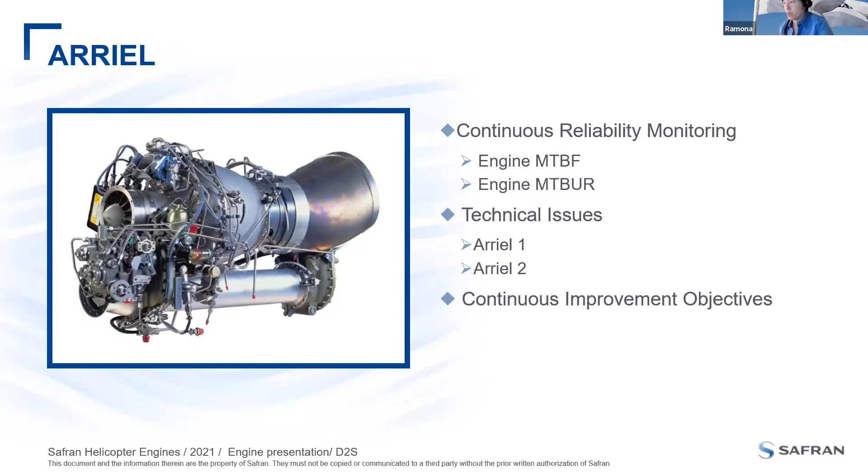Okay. All right, so reliability, continuous monitoring. Just one second, I'm going to stop my video because I got a message here that my audio is a little bit sketchy, so I'm going to reduce the bandwidth. Stop sharing. Okay, hopefully okay. So the video is off, so hopefully the audio will flow through a little bit better. Okay, so where was I?

So continuous monitoring - we're going to talk about technical issues related to mean time between failures. Over the course of the years, Safran Helicopter Engines analyzes data that comes in from the MRO, from operators, incidents, and we take that data and go through it with basically everything that we have, and we come out with analysis to identify the reasons for removals, the ones attributed to the engine - mean time between failures, and mean time between unscheduled removals.

Okay, so the mean time between failures for the REL engines, for the single engines right now, is 13,000 hours. That's data from 2020. And for the twin engines, that's 16,000 hours. So it shows that the Arriel engines are very reliable, and the removals related to these types of failures are beyond the operator's control.

Okay, so these removals can be mitigated through maintenance manual updates, like modifications of criteria, such as increasing the periodicity of a borescope inspection, or they can be improved with modifications to the parts. So something to keep in mind is that not everything requires a design modification, but there are always corrective actions to reduce these types of removals.

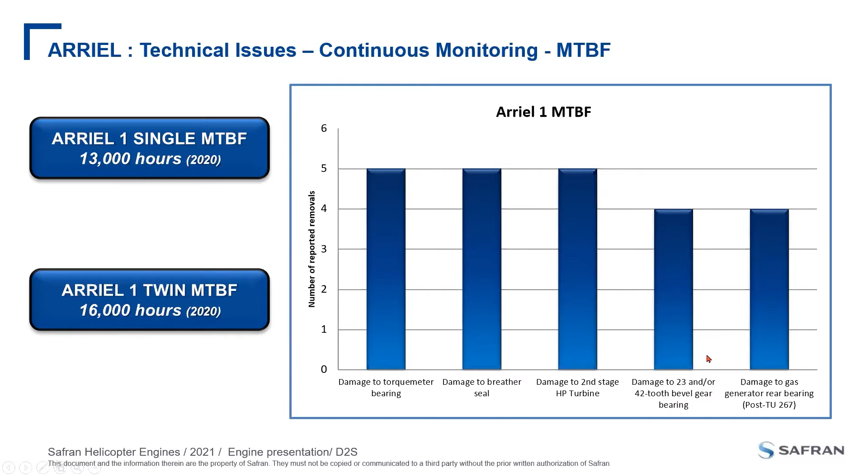This illustration shows the location of each damage and the modifications we've developed to reduce this type of removal. As I said earlier, the top reason for removal is damage to the torquemeter bearing located in module 5. Previously, with the old generation bearings, it was a triplex bearing. Since then, we've developed a modification to include a monoplex bearing that's more robust and resistant to skidding. So now you've got one bearing instead of three, working with the torquemeter piston.

The second reason for removal is damage to the breather magnetic seal. We had 5 cases in 2020, so there's a dedicated study group analyzing removals due to mag seals. This isn't just MAC seals to the breather gear, but also MAC seals related to the starter generator, MAC seals to the power shaft, and the MAC seal for the fuel shaft located on the rear side of module 5. The study group has put together some recommendations, which I'll give more details on later in this presentation.

Another thing we've developed and improved is a video installation tutorial available on the Customer Portal. That video was updated earlier this year, so I invite you to have a look at it because it's very informative and gives a good illustration of how to install the mag seal, along with some tricks you should adopt.

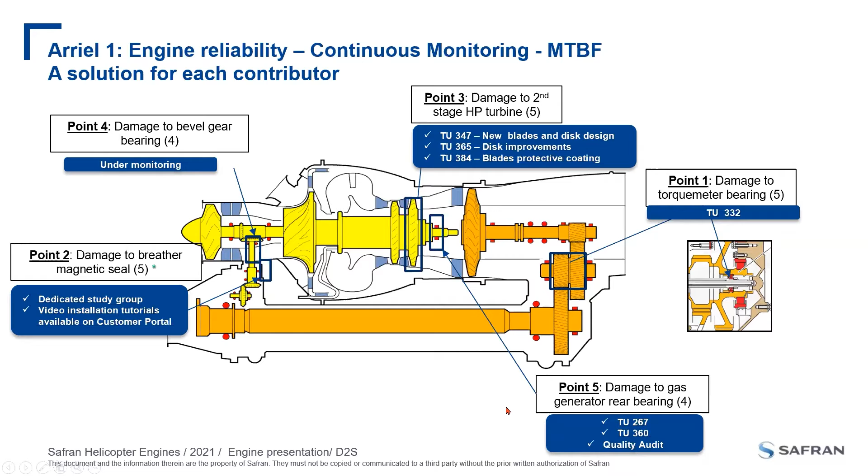Now that we've covered Arriel 1, I'll go into some insight on the Arriel 2 analysis we've done. For the Arriel 2 single engine, the MTBF is 17,000 hours, and for the twin engine variants, we have 1 unscheduled removal every 12,000 hours. So despite the issues we have, the engine itself is very reliable.

The top reasons for removals, the top 5 we've identified: first is free turbine rubs, with 8 cases in 2020. Then 5 cases of module 5 and module 2 oil plug bonding, causing oil leaking from these oil plugs. And 5 cases of damage to the axial compressor rear bearing.

The fourth reason for removal is 5 cases of damage to the gas generator rear bearing in module 3. And lastly, we have 4 cases of damage to the free turbine labyrinth.

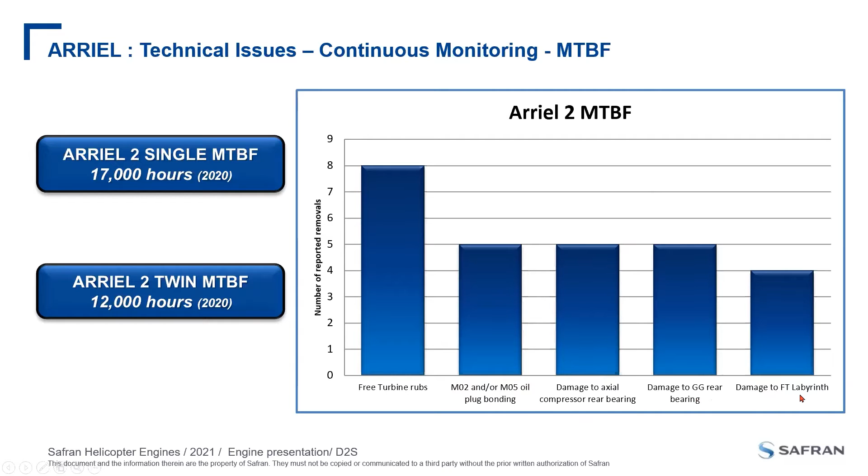Once again, illustration of the location of this damage and the modifications that we've developed to mitigate them.

Top reason for removal located in module 4 is the free turbine. We've seen 8 cases of free turbine blade tip rubs. Something we need to note is that the clearances between the shroud, or the blade path, and the blade tip itself are very, very small. That's because we need to extract as much energy as we can from the gases. But having clearances so tight, there tends to be some possibility of blade tip rub.

So we've introduced a modification called TU 215, which increases clearances between the blade tips and the shroud. It strategically increases the clearances at the 4 o'clock location as well as at the 6 o'clock location, just by a little bit, but we're still able to maintain the engine performance.

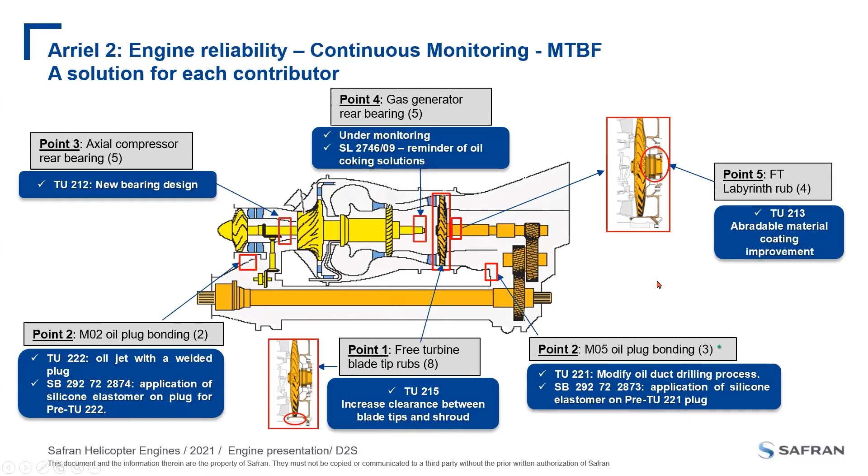Now I would like to talk about unscheduled removals that could be improved or avoided through maintenance recommendations. The MTBUR for the Arriel 1 single engines is 5,500 hours, and for the twin engines that's 4,700 hours. On average, you have one unscheduled removal maybe about every 5,000 hours.

These removals are due to maintenance that can be controlled by the operator. As you can see from the top reasons for removals, the top two are erosion, corrosion, air path fouling, and FOD. In total, just these top two reasons accounted for 63 removals in one year, in 2020.

The third reason for removal is operator handling errors, with 11 events. The fourth reason is unconfirmed causes, with 9 events, where engines or modules were sent back to us and we could not identify the reason for removal, such as an oil leak, starting issue, or noise. It's very important to actually contact your field rep prior to removing the engine.

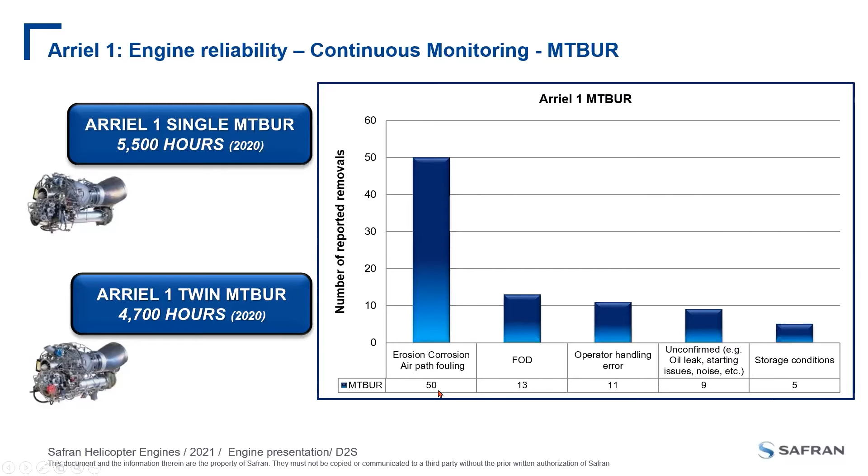The importance of this is to highlight that the majority of unscheduled removals can be reduced if you adapt your maintenance to your operating conditions. So if you foresee that the aircraft is flying in a very salty or polluted environment, increase your engine washing and cleaning procedures, because that really helps a lot in recovering performance and reducing your repair costs.

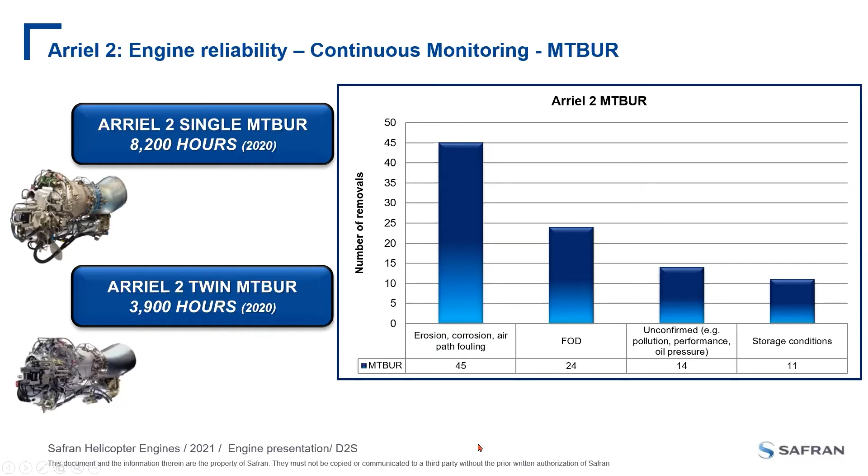As an example, we did a very detailed analysis on the main contributing factors, which are erosion and particles and corrosion that are introduced into the engine. As a result, we've got performance degradation and premature removals. This is our top unscheduled removal cause.

From our analysis, we've seen that if you take control of your corrosion and wash your engines, the actual corrosion removal rate is reduced by a factor of 4. That's done by simply cleaning and washing your engines, and that increases your T4.5 torque margin. That's all done by customizing your maintenance — it's proven. By doing that, you increase your engine availability and reduce your operating cost.

Air path fouling causes a lack of airflow in the engine, and with air path fouling you have a loss of power of the engine. So that has a huge impact on your engine aging.

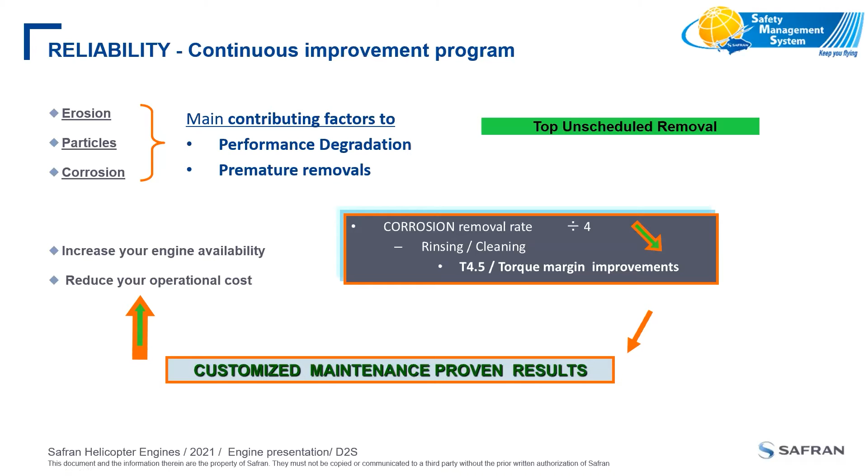One thing I'd like to bring to your attention as well is that water quality is important. If you use plain water, like tap water, it has very high mineral content, so when you dry your engine you've got lots of deposits in your engine. Please use filtered water.

Here I have a real life example to show that rinsing, washing, and cleaning the engine does work. In the top corner of your slide, we have two photos. Here you can see that this engine is quite dirty — it's got a lot of probably salt deposits or some sort of particles in the combustion chamber. Before cleaning, the torque margin at ISO T4.5 was 3.4%. After cleaning, that torque margin increased to 11%. So that's an 8% increase by just cleaning your engines — a very significant increase.

There is a general service letter, GSL 3055, that was issued in October 2020. This service letter is very informative — it provides a description of environmental conditions that are typically associated with erosion, corrosion, and engine fouling.

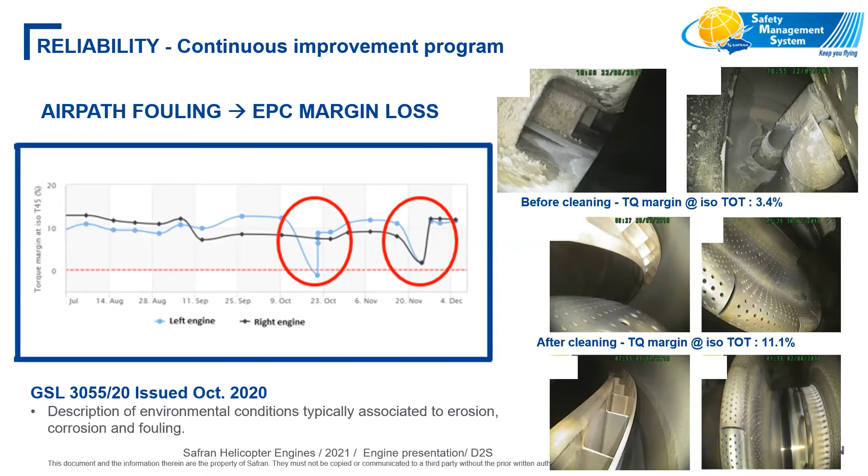All right, so now it seems like the opportune time to talk to you a little bit about safety management system. The previous slide that I had presented is kind of in the spirit of Safran's mandate for our safety management system. So Safran Helicopter Engines, we focus a lot on adopting a safety culture, and we have put in place a safety management system.

So the importance of it is that it encourages everyone, the OEM as well as the operator, to put in place a system that has a methodological approach towards managing safety, which includes the necessary organizational structure, your accountabilities, your policies, and your procedures. The SMS will only be effective through an understanding of the hazards in your organization, the associated risk, and the development of strategies to mitigate these risks.

So it can be as straightforward as customizing your maintenance program when operating in an erosive and corrosive environment, or maybe if you're already in an area where there's increased risk of FOD. By putting in safety nets, you're going to reduce your risk of FOD. And as well, the top two categories of unscheduled removals that I mentioned before—erosion, corrosion, and FOD—can be addressed, and therefore you'll be reducing those removals.

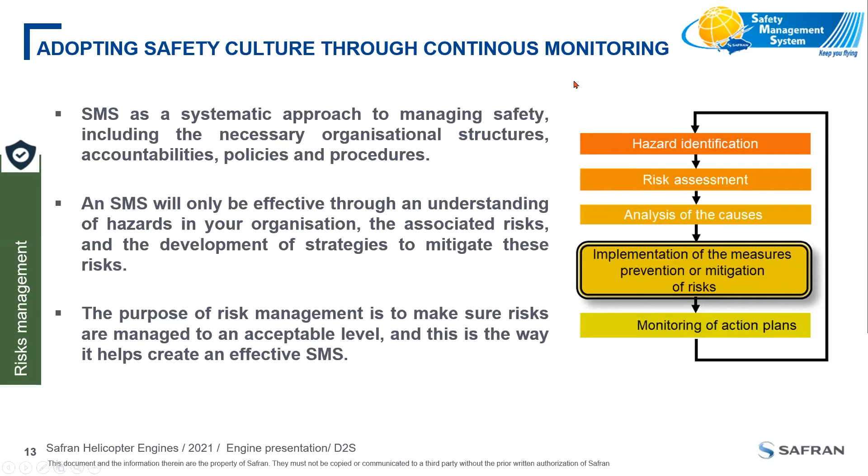All right, so we're midway through the Arriel presentation. I'm going to talk to you about a few bits about technical issues on the Arriel.

Arriel 1. So this I've heard from a few operators, as well as from my engineering department, as being a top irritant: the magnetic seals on the Arriel 1 and 2.

So, putting things in context, this is observed during maintenance or during a pre or post flight check. Seepage of the oil onto the engine deck is no longer tolerated by operators. Customers have requested to drain the oil leaks, and some of the other OEMs have this method in place to drain the oil leaks into a common drain. But the majority of our events are associated to starter mag seals.

And as you can see here from the photos to the right of the slide, we've got oil that's coming through or pooling at the starter generator flange, and that's the mag seal that's in there.

Root causes for oil leaks from the mag seals: the assembly process. The actual graphite ring in the mag seal is very sensitive to shocks, so any minor chips or cracks or even dust could reduce the efficiency of sealing the oil. There's also this subject about the design and the repair process—there are limitations to the design of the mag seals.

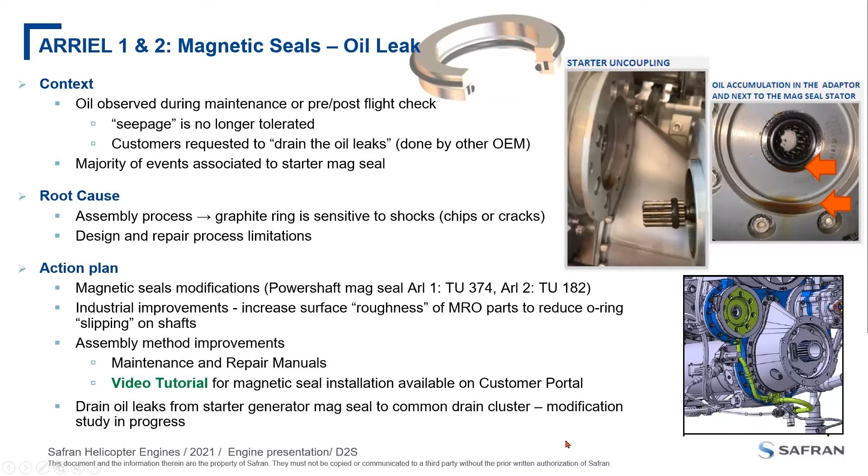Okay, so technical issues for the Arriel 2. This is one of the top reasons for removals that I mentioned earlier, attributed to the engine.

It's the module 5 oil seepage at the oil duct. This is noticed during a visual inspection. It's not an airworthiness issue, but what you may see is oil coming down on the front face of the module 5 from that oil duct and the nut and washer. This happens because the bonding starts to degrade over time.

So some corrective actions are in place. Firstly, if you see it, it's more of an irritant. If your oil consumption is less than 200 milliliters per hour, then keep it in service until your next scheduled maintenance. There is a modification in place for it.

That modification changes the way we drill and produce the oil duct. With the pre-mod, we would drill from the outside in, so outside of the module casing into the duct for the oil jet, to access the oil jet. But now with the new modification, TU 221, we drill from the inside out, going in from the internal side into the module 5. We drill it and stop before it reaches the outer part of the module 5 casing, then we stop.

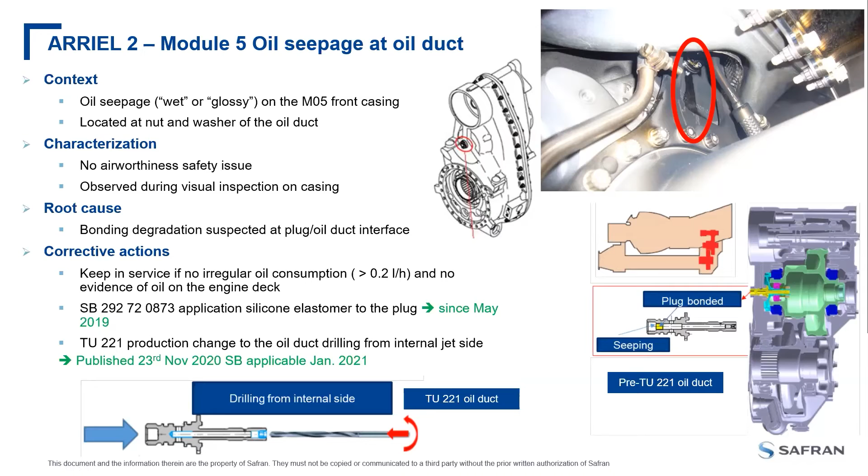Next topic I would like to share is the Arriel 2D and 2E oil pump leakage. Putting things in context, this was observed on the engine deck during a post-flight inspection, and the oil originates from the screws there on the oil pump.

Root cause of it is that these particular screws don't seal the oil pump efficiently. All pumps concerned are pumps with part number 0292 12 5130 and 5140. Typically, we've seen from our return of experience that the oil tends to leak with the oil pump less than 60 hours.

The screws that we've identified, ending in 0230, have been installed on pumps with serial number below 4232 MTL. So these pumps, manufactured before July 2020, have an issue with oil leaks.

Corrective actions that we've put in place: firstly, we've developed new calibrated screws, part number 0292 120690. These screws have been installed onto all pumps with serial numbers ending in VEI, and on all pumps starting with serial numbers 4232 MTL.

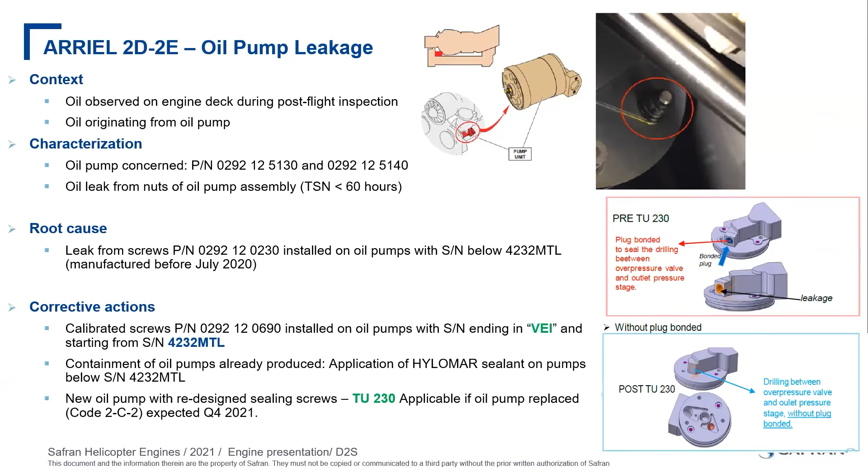So just in summary, through all this continuous monitoring in the previous slides, and through our SMS and continuous reliability analysis, we've identified areas of improvement where we have diligently developed solutions. In the last 3 years, we've developed a modification to improve the motor 2 bearing, that's TU212. We've had increased cases of fuel coking, so we developed a modification to the fuel injection manifold, more tolerant to fuel coking, that's TU208.

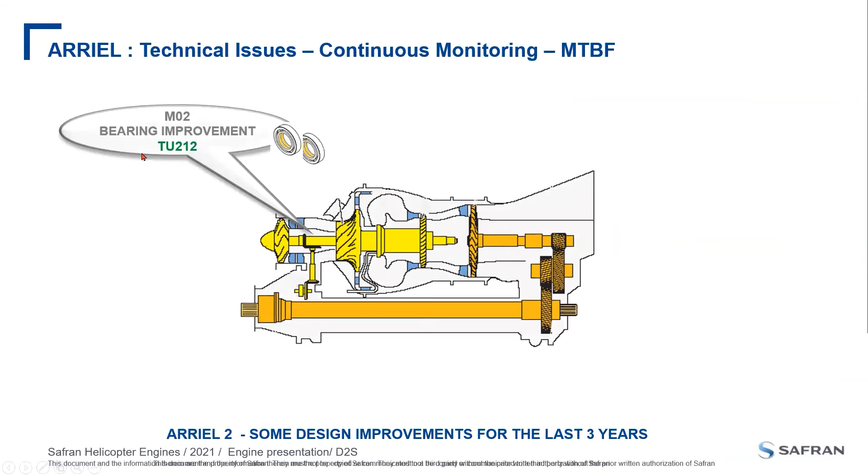We've also had some cases of power turbine blade tip rub, so a modification to the shroud, TU215.

Labyrinth seal coating, right, TU213.

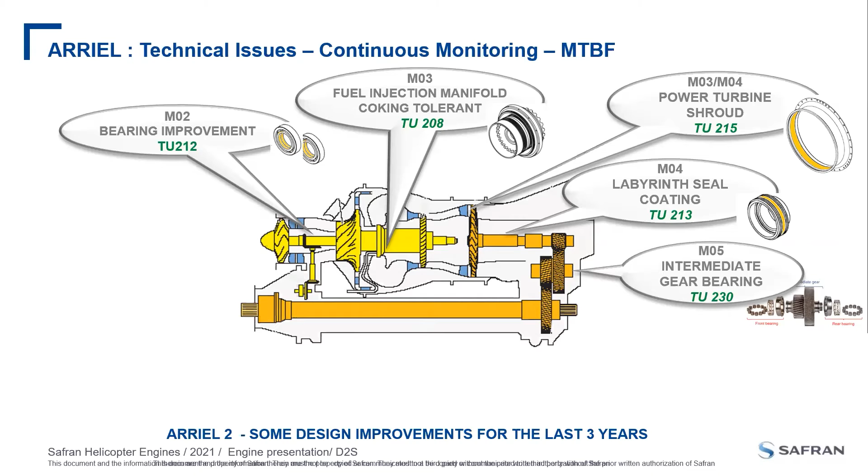Module 5 intermediate gear bearing, TU230. That's introducing more robust bearing to the front and rear of the intermediate gear, so it's more resistant to maximum loading.

In module 3, we've got oil sealing systems and improvement to the sealing, so improvement to the supply duct, the scavenge duct, and the vent duct. That's TU181 and TU201. Conformation boxes, we've increased their reliability, improved it through TU192.

Module 1 front support, TU197. And improvement to the front casing wear of the accessory gears, that's TU194, which includes a bushing into one of the accessories, the actual 41 tooth gear.

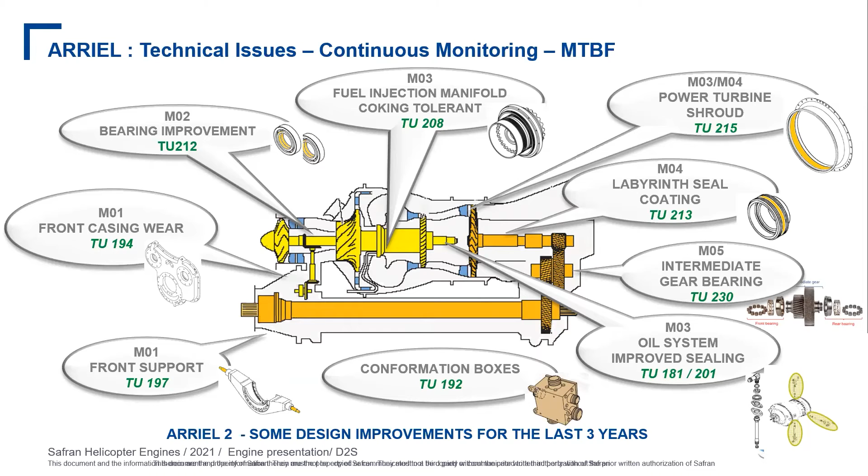All right, guys and ladies, we're going to go into some information I'd like to share with you that concerns the FCU, HMU, and accessories.

So similarly to the bare engine, we also do reliability monitoring on the accessories, FCUs, and HMUs. So for the Arriel 1 FCU reliability, the top reasons for failures.

The first one comes in at 17 removals in 2020 due to matched pistons out of limits. Second reason for removal, 17 cases, damage to the NG and or the NTL seal. Third reason for removal, damage to the diaphragm of the deceleration control unit. And fourth reason for removal, static droop out of tolerance.

Out of these 4 reasons for removal, we have developed 2 modifications that allow you to replace and repair these parts in the field. First one we shall address is the NG and the NTL seal.

You can look at the illustration to the right of the graph here. So the NG shaft varilip seal, we developed an internal modification to improve the quality and sealing of the NG varilip seal. And to address the fuel leak from the NTL seal, we've developed modification TU367. This is an improvement to the dynamic sealing of the Sealol seal.

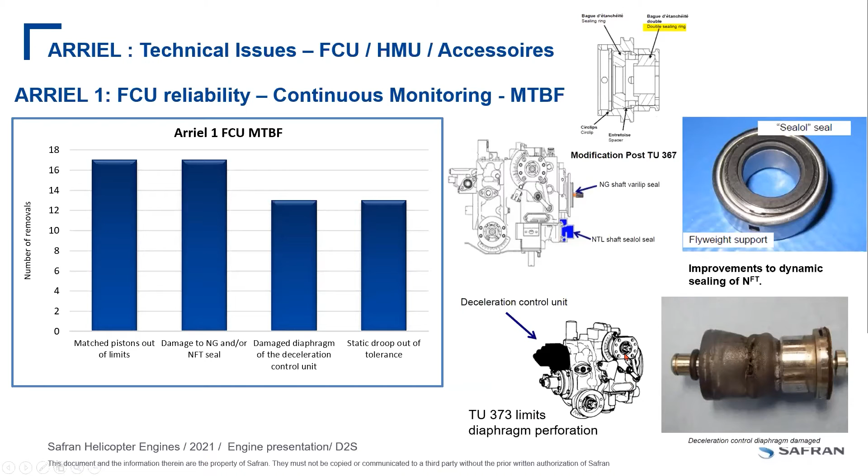Moving on to Arriel 2, HMU reliability on the single channels. Top reason for removal, we had 5 cases in 2020, and that is damage to the drain valve assembly.

Symptoms that you would expect here, if you have a damaged drain valve, is start stagnation, slow start, fuel leak at the drain. This drain valve assembly can be replaced in the field.

Second reason for removal, actuator resolver damage. There is a modification available, that's TU83, which increases the actuator reliability by improving the stepper motor characteristics.

Third reason for removal, P3 body assembly anomaly. That's where in some cases we found a pierced P3 capsule. This P3 capsule can be replaced in the field as well, as a level 2 maintenance action. Symptoms that you would see from a P3 capsule anomaly is slow start, aborted start, or even no ignition.

Last reason for removal is rotating load limiter. Symptoms you would see with this type of damage is a slow T4.5 increase during start, that's when the rack itself is distorted. Unfortunately with this, there's no field replacement available, so we'll just have to replace the complete HMU.

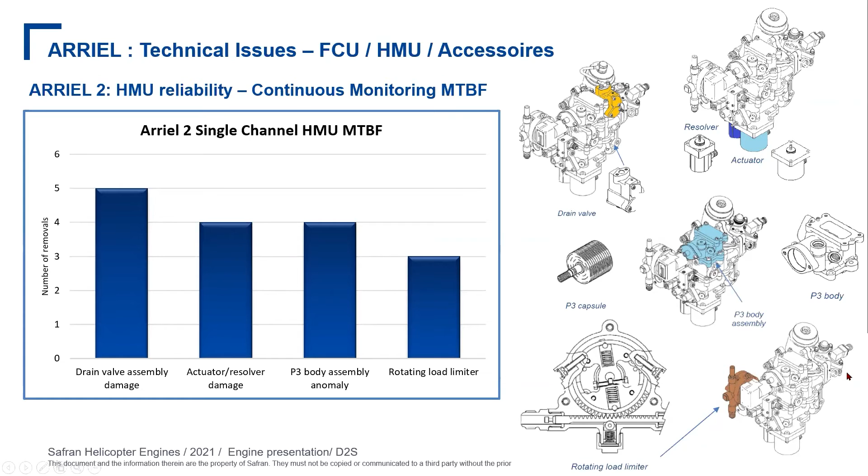Arriel 2 dual channel HMU MTBF. Top reason for removal, we had 82 cases of removals due to damage to the splines of the HP pump, LP pump, or the coupling sleeve.

This inspection is called out, as we all know, in the SB 29273-2851. This is for post TU177 HMU, where it needs to be inspected every 800 hours.

Second reason for removal is the LP pump assembly wear, about 12 removals in 2020. Drain valve damage, similar to the single channel, is replaceable in the field.

One thing I'd like to bring to your attention is related to the HMU inspection. Alert SB 29273-2851, that's revision D, Delta, that was issued in May this year, May 2021.

As a little quick refresher, this SB requires you to inspect the HP and LP interpump splines every 800 hours, looking for signs of wear. What the SB calls out, or the technical instructions call out, is a demarcation of the splines.

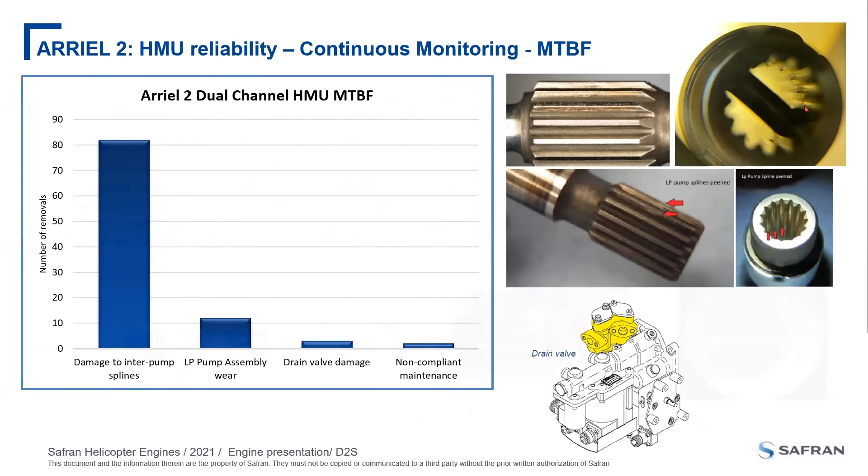Here you see certain demarcation on the splines of the HP, the LP, as well as the coupling sleeve. But one thing that has changed in this SB, in the revision D, is the possibility of just replacing the coupling sleeve.

But this can only be done if there's only contact wear on the HP pump, so the HP pump shaft. That's just little wear marks around here on the face of the HP pump shaft. If that's the only damage you see during your inspection in location 5, then you can keep the HMU in service by just replacing the complete sleeve.

However, if you find some sort of demarcation or corrosion on the splines itself, whether it's on the pump splines or on the sleeve splines, then that still requires HMU replacement.

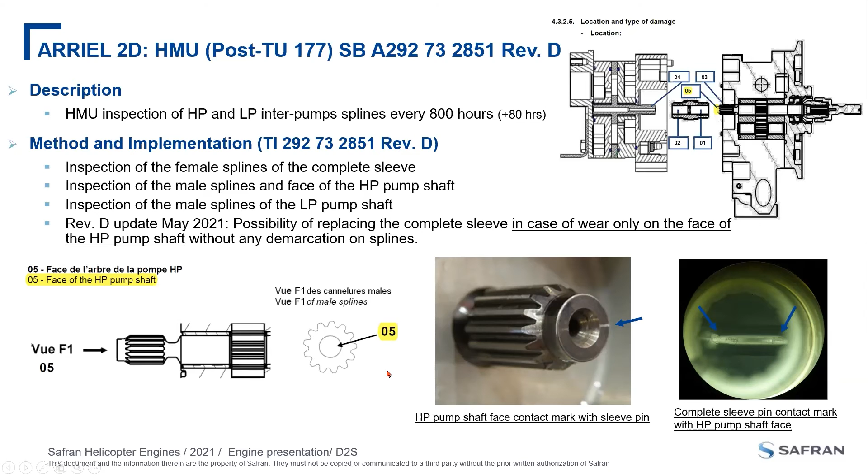Okay, so the medium term action plan that we put in place is TU210. That's a DECU software modification that monitors low fuel pressure. It introduces an algorithm that's able to detect low fuel pressure prior to an in-flight low fuel pressure indication.

This detection comes up as test reference 185. This DECU software modification also introduces a signal in the event of a sudden interruption of fuel supply at the engine inlet, and activates the engine stop electrical valve to limit damage in case of a power turbine overspeed, when your N2 goes beyond 120%.

One thing that's very recent in customer portal is that in the event you have a test reference code 185, you are required to perform an EDR dump. Our customer portal just last week has been updated to include a module where you can upload your EDR dump directly to customer portal.

That is outlined in Service Letter 3072/21/ARL2. This makes everything more streamlined. Instead of sending it by email through a Dropbox, because those files are very big, you can securely upload it to our server, and this data is then sent to the specialists who are able to perform an analysis of your EDR dump.

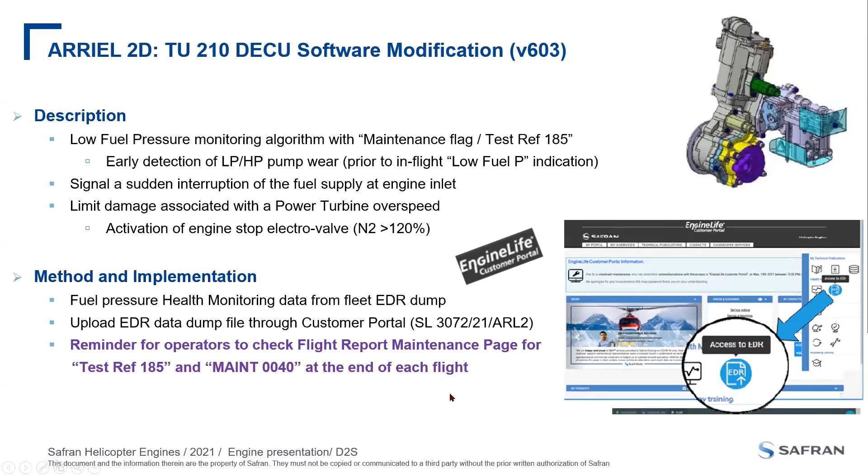Okay, so lastly, continuous improvement objectives - a brief overview of what we have done recently and what we plan to do in the future. In 2019, we removed the use limit life of the bearings on the Arriel 1 and 2. The Arriel 2D free wheel has TBO increased to 5,000 hours. Arriel 2E has a TBO of 5,000 hours.

In 2021, still before the end of this year, we are anticipating an increase of our injection wheel cycle limit on the Arriel 2+ and 2x2, from 8,000 cycles to 10,000 cycles. The package is with EASA. EASA is reviewing it, and we've been persisting with them for a response before the end of this year.

We expect it to be a positive response, but of course there's always the risk that EASA could come back and say no. Just watch this space, and I will be sure to advise our field reps once we get an answer from EASA.

Okay, so in 2022, looking a bit forward, a work in progress is that we are evaluating the Arriel 2B1, 2D, and 2E maintenance plan. Sometime in the future, forecast for the Arriel 2E is to extend the main inspection from 800 hours to 1,000 hours.

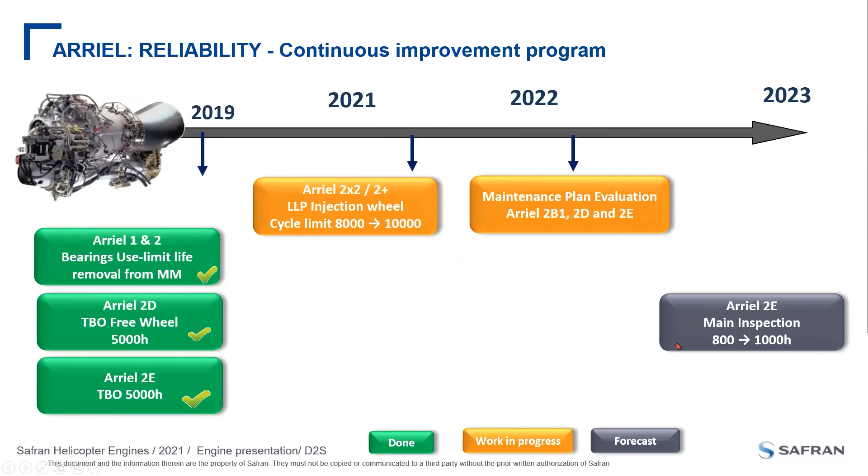All right, so that brings me to the end of the Arriel presentation. Do we have any questions?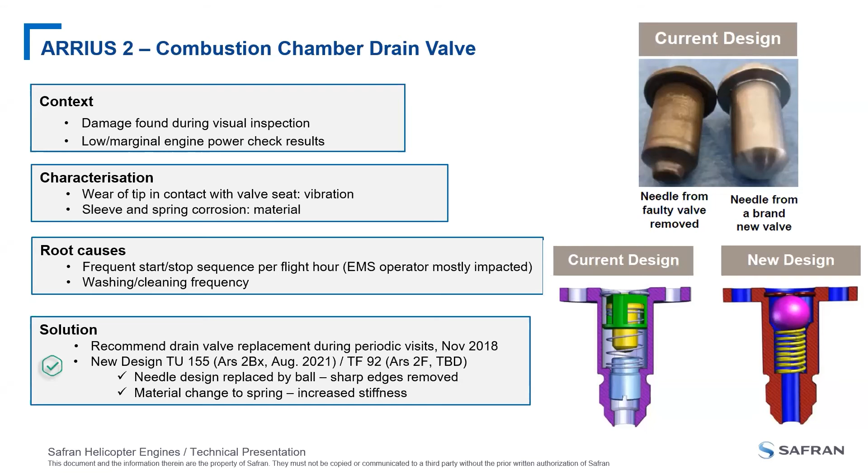Okay, so Arrius presentation. Arrius 1 and 2, I'm gonna go through it in a similar fashion as the ARIA 1. We're going to talk about continuous reliability monitoring and MTBF and MTBUR and the Arrius 1 and 2, and then we're going to elaborate into some technical issues for the Arrius 1 and the Arrius 2.

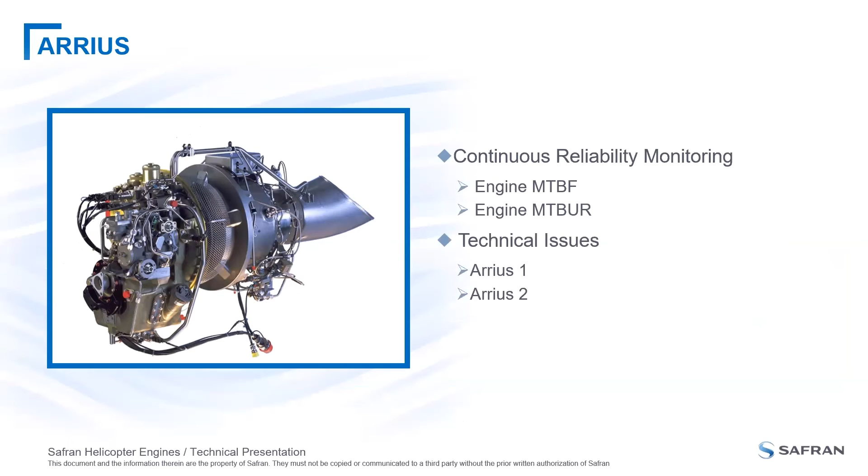Alright, so the Arrius 1 - your mean time between failures is 4,100 hours. That's about 1.3 times your engine overhaul life. The engine overhaul is at 3,000 hours. So you've got one unscheduled removal every 4,100 hours.

Top 3 reasons for removals for the Arrius 1, because they only have 3. The first one is a big one - damage to the accessory gearbox bearing. We had 10 cases in 2020, followed by 2 other reasons for removals, at 1 each: damage to the reduction gearbox output gear rear bearing, and 1 case of clogging to the rear bearing oil return pipe.

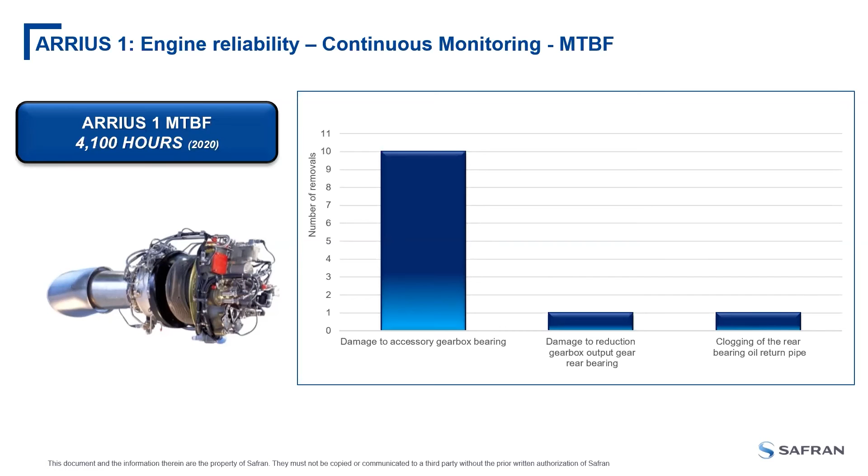Okay, quick illustration of the damage. Top reason for removal is module 1 accessory gear bearing damage, 10 cases, and this is associated to that bearing at the front and the top section of module 1. TU-121 has been developed and it replaces the bearing with a riveted bearing that's more robust to certain forces that would have created damage to the previous modification.

Second reason for removal, just with 1 case, is damage to the output gear rear bearing. 2 modifications are available for it: TU-114, which increases the rear bearing race strength, and TU-119, which improves the oil scavenge flow path. Oil flows from module 2 down to module 1, and sometimes that affects the operation of the rear bearing in module 1.

Third reason for removal is clogging of the rear bearing oil return pipe. There is a modification in place for that, known as the non-return check valve, TU-85, which is installed in the scavenge line. This stops any oil flowing back into the rear bearing area after engine shutdown. Now, if your engine is still persisting with coking in the scavenge pipe, please reach out to your field reps, because there is a mechanical cleaning procedure that we can issue through a technical agreement specific to your needs.

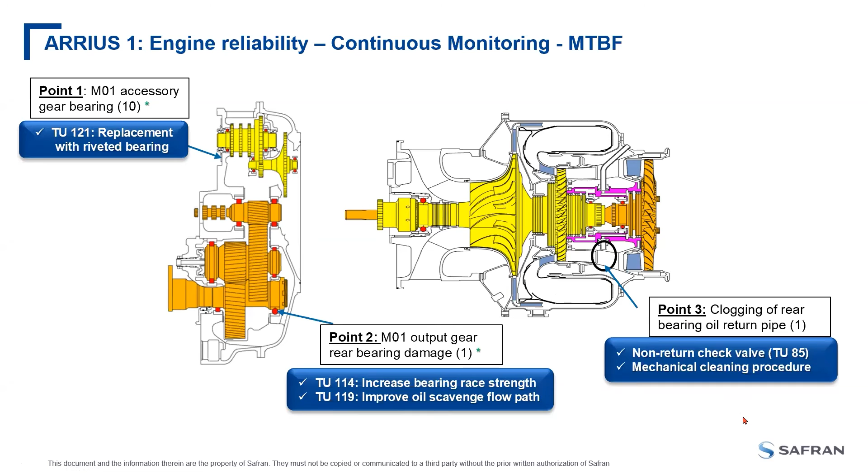Arrius 2 mean time between failures in 2020 - the MTBF for the Arrius 2Bx engines is 1 unscheduled removal every 7,900 hours. So that's almost, let's say, 1 removal every 2 overhauls.

Your top reason for removal is 8 cases due to cracks in the combustion chamber. The second reason for removal is 5 cases of the module 2 rear bearing supply and scavenge ducts that have cracks in them. The third reason for removal, 4 cases, is due to damage of the free turbine NGV Omega seal. And the 4th reason for removal is damage to the starter and breather mag seals.

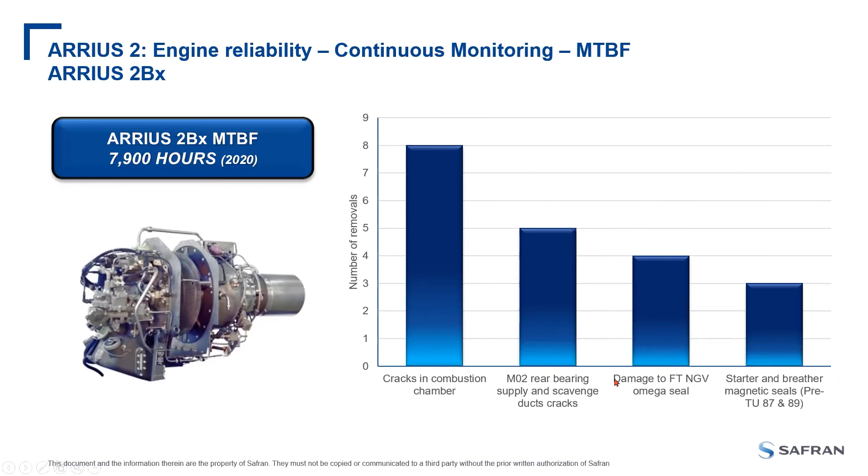So first point, cracks in the combustion chamber, right here in module 2. 3 modifications are available for it: TU-117, which improves the fuel draining and optimizes the purging of the fuel system. Second modification is TU-135, which improves the flame tube robustness, introducing new material as well as ceramic coating to the dome. And TU-142 is the thermal insulation seals at the injectors. I've got a slide later on to give you more details about these modifications.

Second reason for removal - cracks in the rear bearing oil duct due to repetitive high tensile stress. We have 5 cases in 2020. What happens here is that one end of the duct is connected to the outside of the turbine casing to module 2, and the other end is connected down to the rear bearing support. So through each start and stop heating and cooling cycle, tensile strength is stretched, and we've seen cracks at the elbows of the duct. So we have introduced a modification, TU-148, which makes the duct out of a stronger material that's more resistant to tensile stresses.

Third reason for removal is damage to the omega seal in the free turbine NGV. This is a new occurrence for us - we have 4 cases in 2020. As a proactive as well as monitoring action plan, we introduced a borescope inspection for troubleshooting purposes in the case of bad power checks specific to the negative T4.5 margin. This is going to be introduced in your next revision to your maintenance manual in April 2022. For the time being, we are still analyzing the events that have occurred - 4 cases on the Arrius 2B.

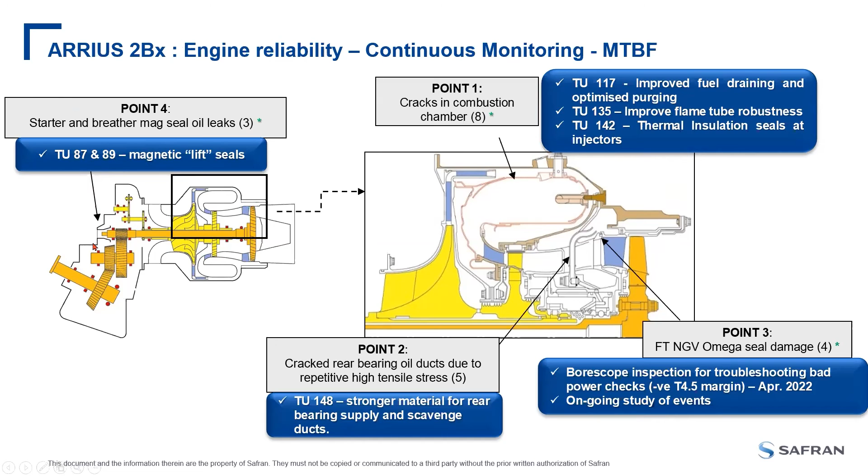4th point - I think we're all aware of this, and most if not all of our Canadian operators have the latest and greatest magnetic seals. The 3 removals that occurred last year were on the pre-mod, the old style magnetic seals, TU-87 and 89 on module 1. That introduced a magnetic seal called the lift seal, so sealing and reliability is much better.

So for the Arrius 2, on the 2F itself, your mean time between failures is 8,200 hours. It's a very, very reliable little engine, where you have only 1 unscheduled removal every 8,000 hours. The top reason for removal: 2 cases of high pressure sealing segment damage, and 2 cases of damage to the omega seal of the PT NGV.

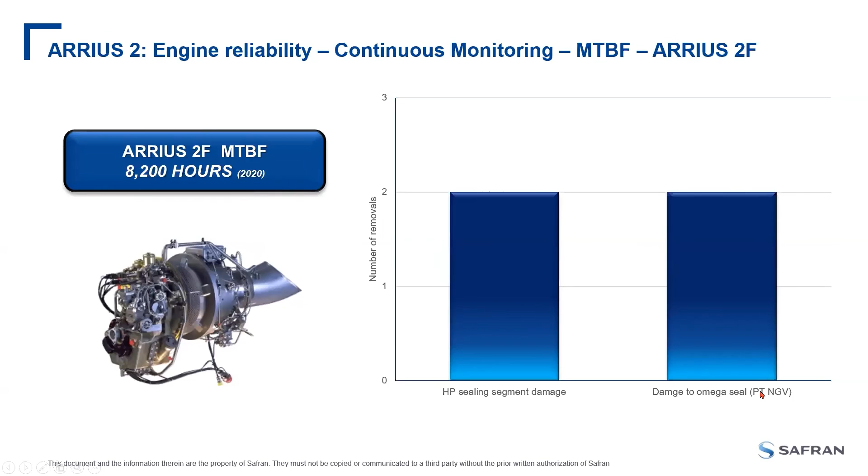Okay, and that's where we see here. First point is sealing segment damage at the HP high pressure turbine section on module 2, right here. We have corrective actions in place in the repair center, but there's still an ongoing study to determine the root causes and reduce the segment displacement.

Second reason for removal, similar to the Arrius 2B, is that you have an omega seal damage at this point.

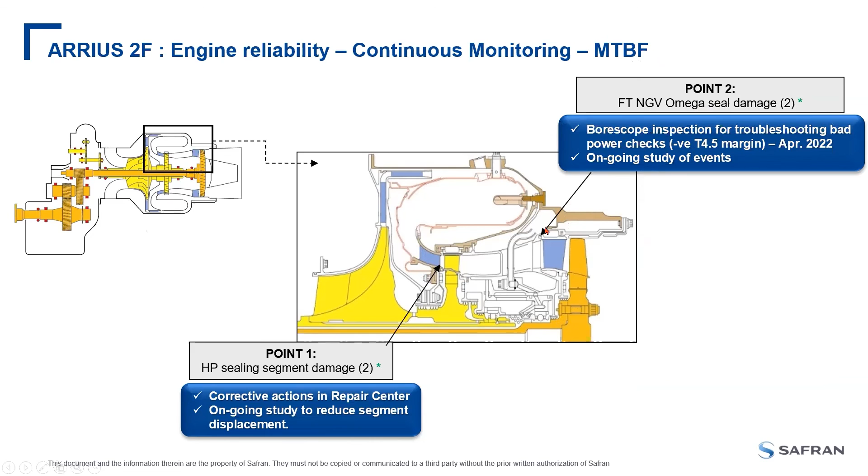Okay, right, so MTBUR for the Arrius 1 and the Arrius 2. The global MTBUR for the Arrius 1 is 2,000 hours, so that's one unscheduled removal every 2,000 hours. For the Arrius 2, you have one unscheduled removal at 3,600 hours on the 2BX, and on the 2F it's 5,500 hours. But as you can see, and that's the same for the Arriel engines, the top reason for removals is FOD, insufficient performance, or airpath erosion. So it is exceptionally important, and I take this opportunity to highlight, that we need to adapt your engine operation to your environment where the aircraft operates.

On the Arrius 2, we have options for an air intake filter to reduce erosion in your air path. But in the event that you are operating in a polluted environment, please remember to continue to clean and wash your engines, because the barrier filter does not stop chemicals from entering into the air path of the engines.

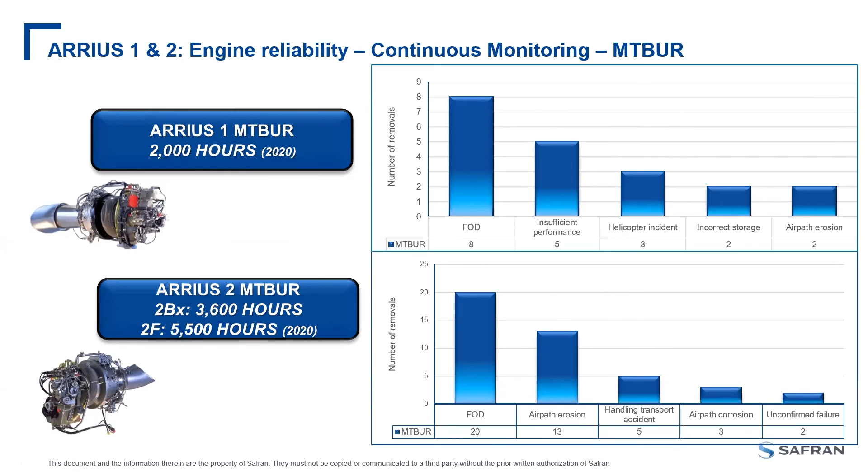Okay, Arrius 1 technical issues.

Engine is damaged at the intermediate gear front bearing. So when you do have a chip light illumination and you pull the chip plug out on module 1, and you find a little piece of metal that could resemble a tab, like a rectangular piece of metal about 2 millimeters in length, that is most likely the securing tab of the separating cage from the intermediate accessory gears.

We've done a number of analyses through quality audits of manufacturing and assembly. There's no deviation to it. This bearing has been used in this engine for a very long time. There were no vibration issues, etc. So we could not determine the root cause for this, but nevertheless, we have upgraded the bearing to one that is riveted, which removes the requirement of any securing tabs. It's a more robust bearing, and that is modification TU121, which has been in effect since January 2021. It can be installed in the maintenance center or the repair center.

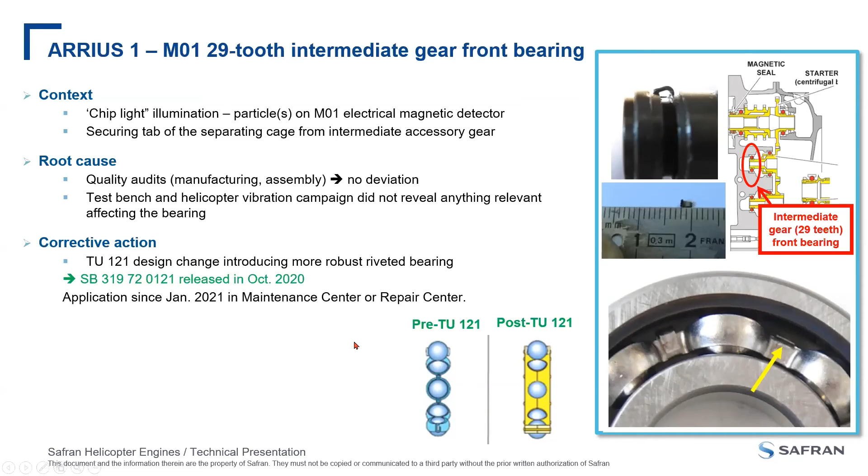Second reason for removal for the Arrius is damage to the output gear rear bearing, also in module 1. You would see an engine chip light illumination. The cause for this damage is two things. One itself is the bearing that has high radial load at certain angles of the bearing.

Second reason for its early deterioration is that the oil scavenge from module 2 goes into module 1 on the side of the casing, but very small debris that comes from module 2, like coked material, ends up polluting the rear bearing here. So the rear bearing prematurely starts to flake. So we have TU114 that introduces a more robust bearing to address the max load of the bearing, and TU119 diverts or protects that bearing from the scavenge flow of oil that's coming from module 2.

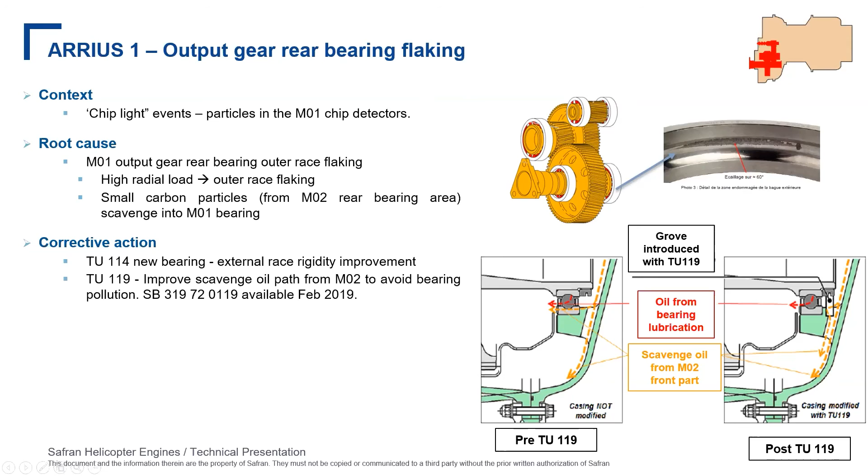Okay, Arrius 2 technical issues. Combustion chamber cracks, I'd like to share with you what we've done. These typically are found during your borescope inspections, and if you have a decreasing T4.5 margin, these are due to thermal stresses. Modifications available to you are TU135 on the 2B, TF82 on the 2F, which is addition of a ceramic coating in the combustion chamber.

TU142 on the 2B, TU85 on the 2F, that's thermal insulating seals. And lastly, we've got TU117.

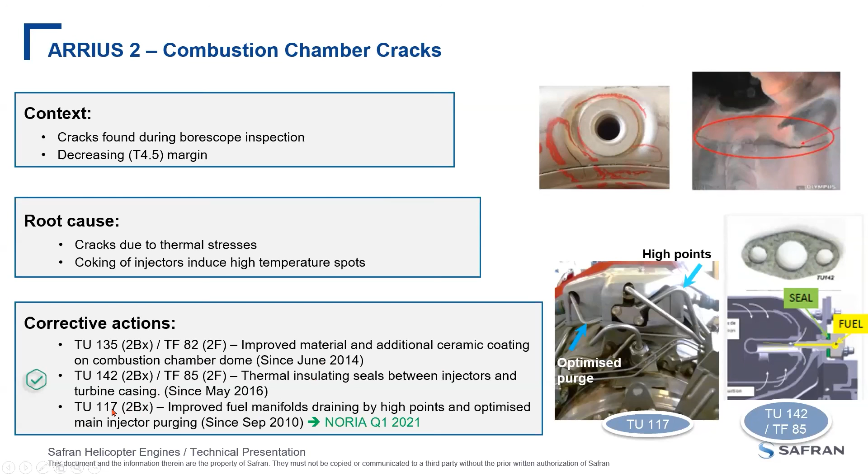And this is what I'd like to highlight to you today and talk to you about: HP sealing ring deterioration. This is what we would typically see when you have a low T4.5 margin in engine power checks, or you could find it during a periodic borescope inspection where you have that turbine ring here that kind of makes its way out into the front of the HP.

HP turbine. So as a corrective action, we're now systematically replacing the 4 segments during each repair process, as well as doing a dimensional check of the grooves where the segments sit.

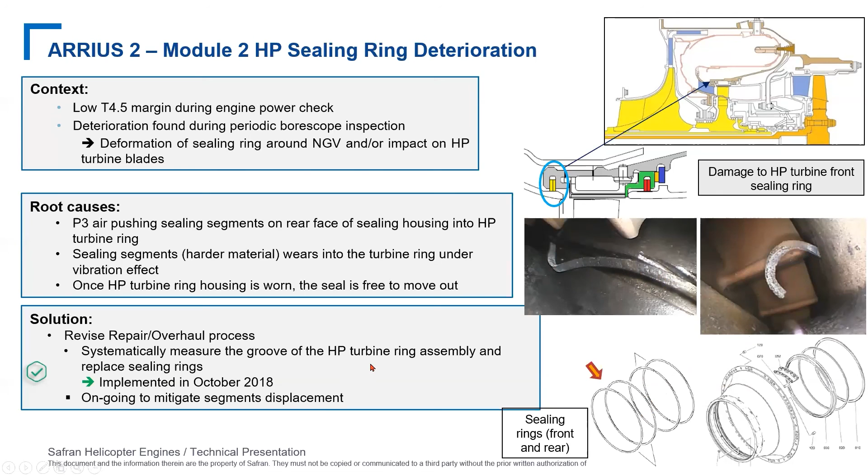Now this new case that's come to our attention in 2020 is the damage to the free turbine omega seal. Symptoms you see with this are unsatisfactory T4.5 margin during engine power checks, and oil leak at the rear bearing area. That's only for very few cases where the actual oil ducts of the rear bearing are damaged. But typically, this damage is discovered during a level 3 maintenance where there's contact wear of the omega seal.

The omega seal is located right here between the rear bearing support and the free turbine NGV. This just rotates in this area through micro vibrations. And to a certain point, if it does make it out of its housing, it may come in contact with the oil ducts. That could cut the oil ducts and end up causing oil leaks through module 2.

The root cause is still being studied, but we put a monitoring action in place for a borescope inspection for troubleshooting purposes during your low power check, specifically T4.5 margin. This will be implemented into the maintenance manual in April 2022.

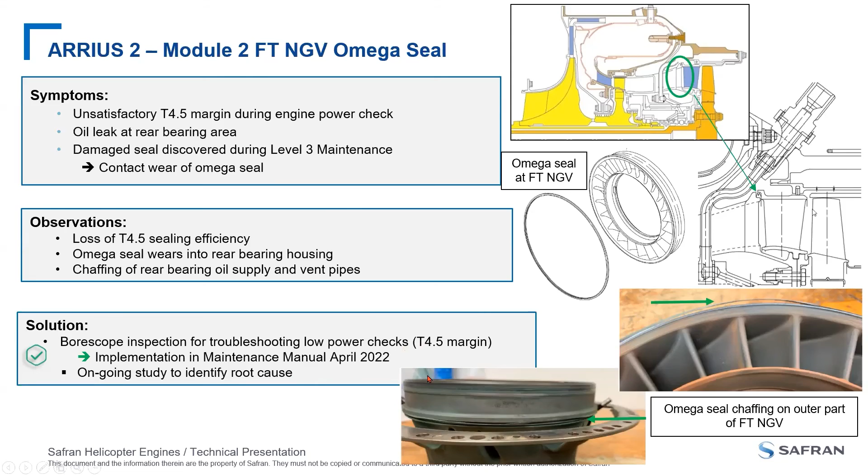I've got just a couple more minutes, so I'm going to briefly talk about what we've seen in the power turbine borescope inspection. This was actually noticed during a borescope inspection where the power turbine blades come in contact with the PT NGV. There was a service letter issued in June 2020, service letter 3050.

This type of micro displacement is due to erosion and corrosion at this local point at the flange of the free turbine NGV. With corrosion and erosion, sometimes the PT NGV tends to tilt toward the power turbine. During the borescope inspection, you may see marks at the upper tip or at the aerofoil section at the base of the turbine.

So there is a 600-hour scheduled inspection on the front face of the power turbine. And if you do see this type of wear, there are allowances for it, but you can replace the power turbine in level 2.

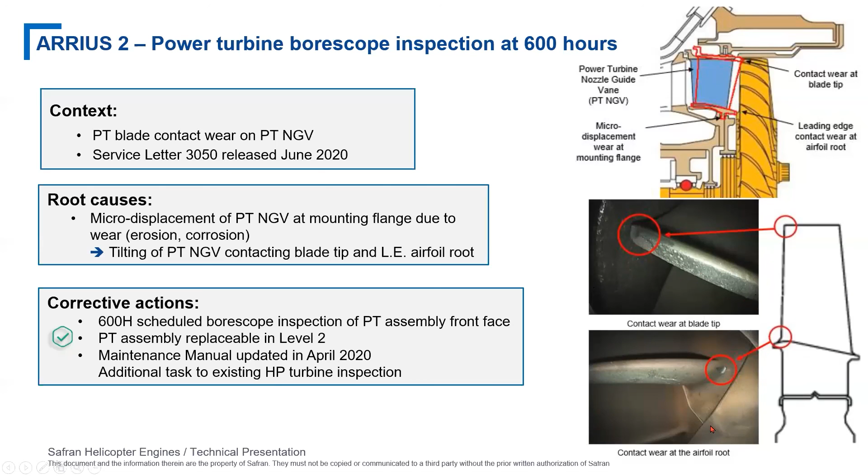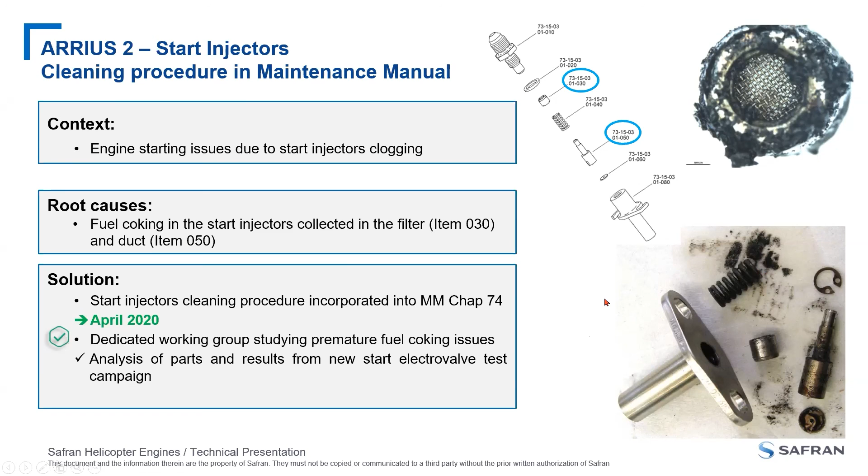All right, everyone, that brings me to the end of the ARRIUS presentation. Sorry about rushing through it, but I wanted to make sure I shared all the information I could. Do we have any questions?